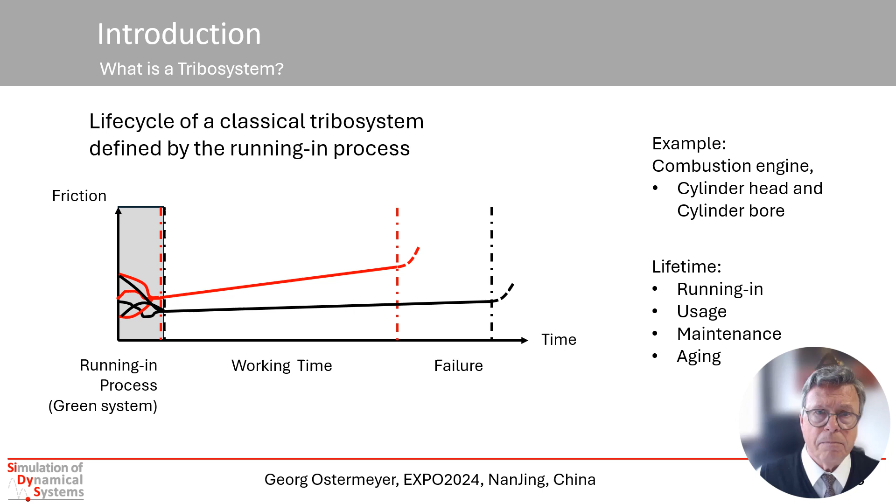The OEMs started to analyze that, and they really found a solution. They found out that the surface finishing is essential, and the running-in process is nothing other than, let me say, a nanocrystalline structure of the material on the inside of the cylinder bore, with a few additives embedded from the oil which is used. And doing that, they could guarantee a rather long lifetime, which is independent of the misuse of the customers.

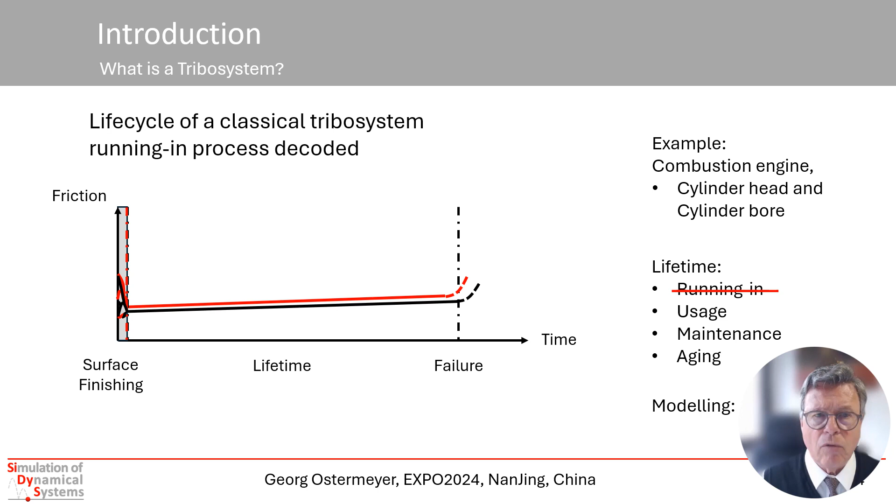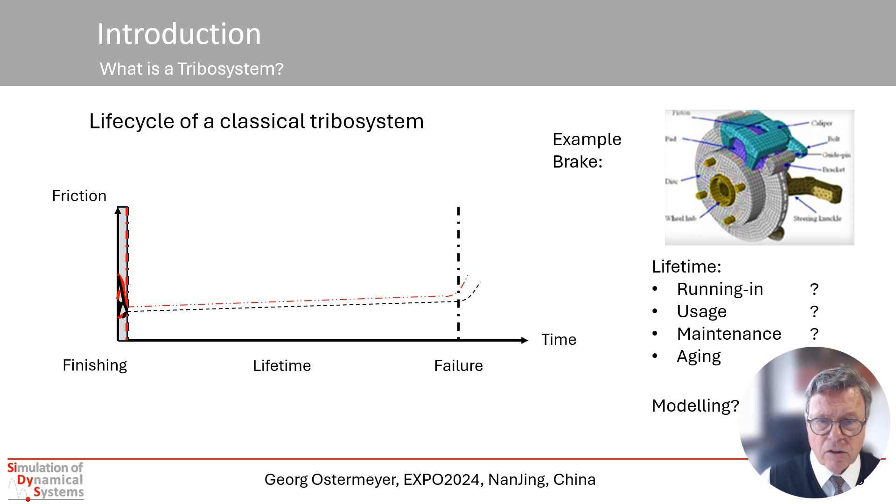Of course, the lifetime of this system is defined too by the usage, by the maintenance, and by the aging. But whatever there is, the modeling of such a system is always concentrating on the lifetime, on the working time of such a tribosystem. But let me come back to the brake system. Again, the brake system is a very famous classical tribosystem.

This brake, a classical tribosystem, is a very complex material system. We have very different friction partners. We have very high friction power in the system, and we have wear in the system, essentially changing this system. And so it is absolutely unknown what the real running-in procedure for brakes is.

Of course, you know some bedding applications you are using, which do something like that. You have rotor coating. Coating seems to be a good idea because that is usually one part of the running-in process of classical tribal systems, and that is the reason why rotor coatings usually have a very good impact on friction in brakes.

The usage. The influence of usage is nearly unknown. We have changes in usage through the new mobility, moving from combustion engines to electrical engines. There are emission constraints coming up, which affect the mobility of these brake systems. And we have maintenance questions. What is humidity doing with the brake pad? In the last years a lot of papers dealing with that question have come up. It is not solved yet.

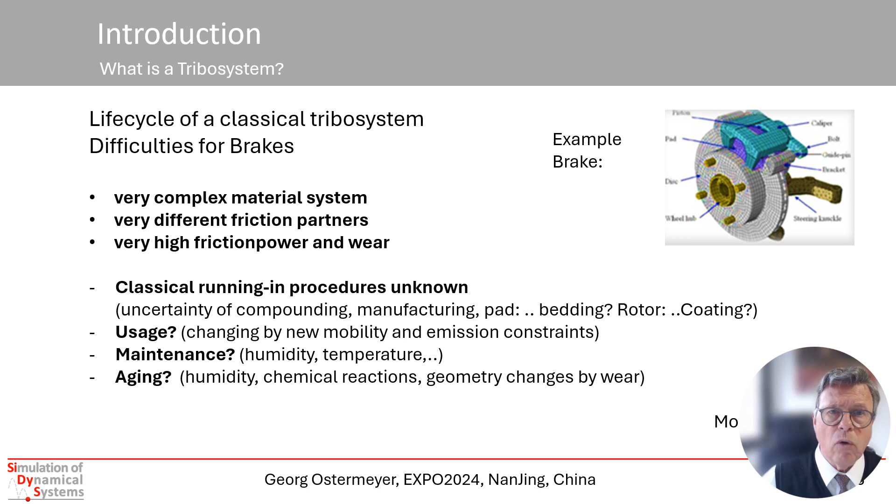And usually this model is a simplified substitute of this clipping region in the world. And the idea is just to replace questions to the world by questions to the model. And there are very different realizations of this substitute. Human intelligence, this is rather old, but you can have purely hardware realizations, for instance, systems, chassis dyno,

inertia dyno, scale test, or whatever hardware you are using. There can be abstract models, abstract descriptions, as known from mathematics or physics. And there can be hybrid models which are partially hardware, partially abstract. A very famous name in this is hardware-in-the-loop simulation, coming up in the last years.

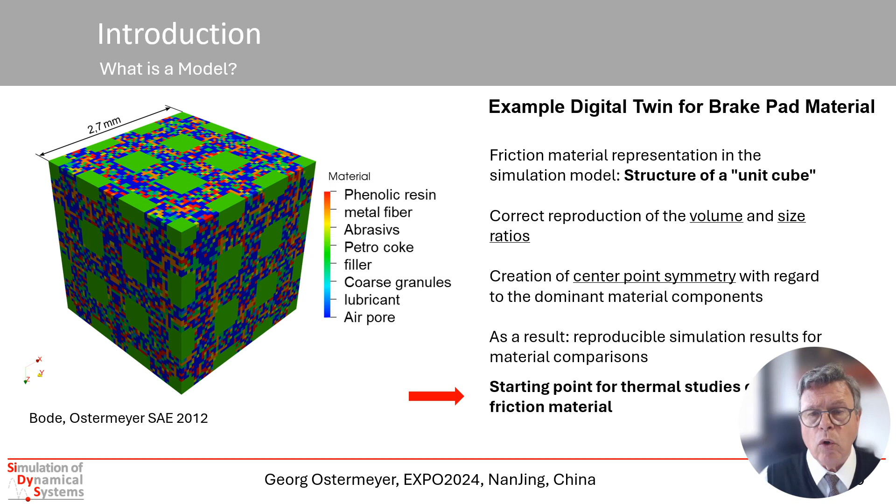And as a result, we get rather good reproducible simulation for material comparisons. And that is the starting point for thermal studies we did 12 years ago. Here you see a very simple example. The brake disc is coming down to the upper face of this cube.

You see just at the beginning of the brake operation, the disc surface heats the brake pad, and then the heat is running into the brake pad because of the very, very different thermal behavior of the materials we have in the brake pad. And at nearly the end of the brake, the disc is cooling down the surface because the disc cools much quicker than the brake pad. So we have in the brake pad something like a heat wave which is running through the pad rather slowly.

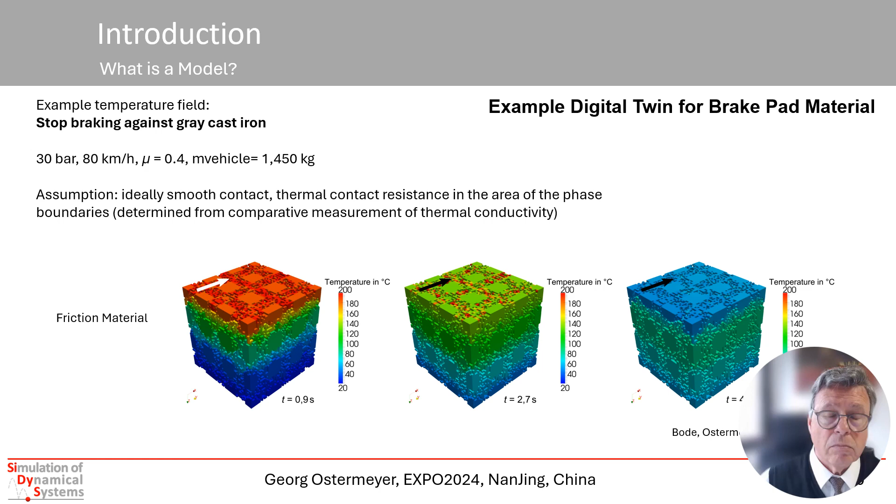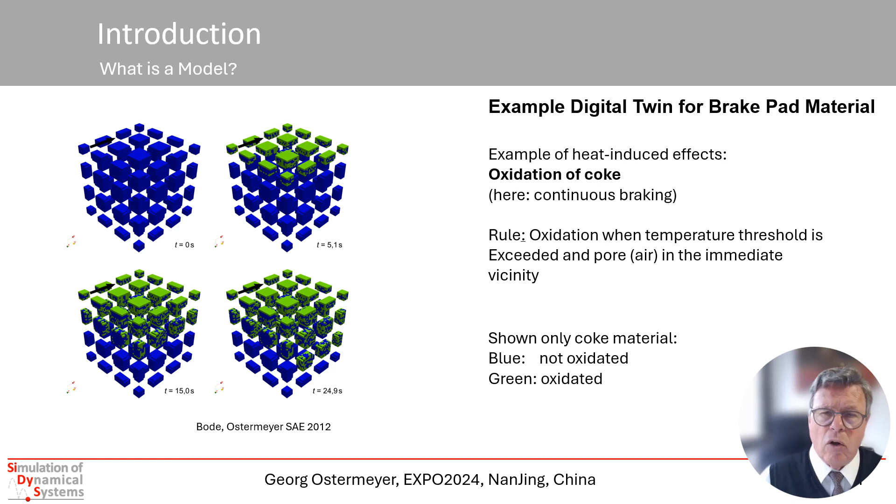By such heat dynamics, we can then look, for instance, for the oxidation of coke. That means when we have at a special point inside the brake pad a special temperature, and there we have in a direct neighborhood coke and air, then oxidation is possible. And what we can see here is something like a dynamic observation of that. There were a lot of papers in the last years dealing with post-mortem detection of these things. This is a possibility to do that online.

Another question Mr. Bode computed here is the pyrolysis of phenolic resin. These rules you can get here from reaction charts which show when there is a special temperature, then this phenolic resin is going in that constitution, that direction.

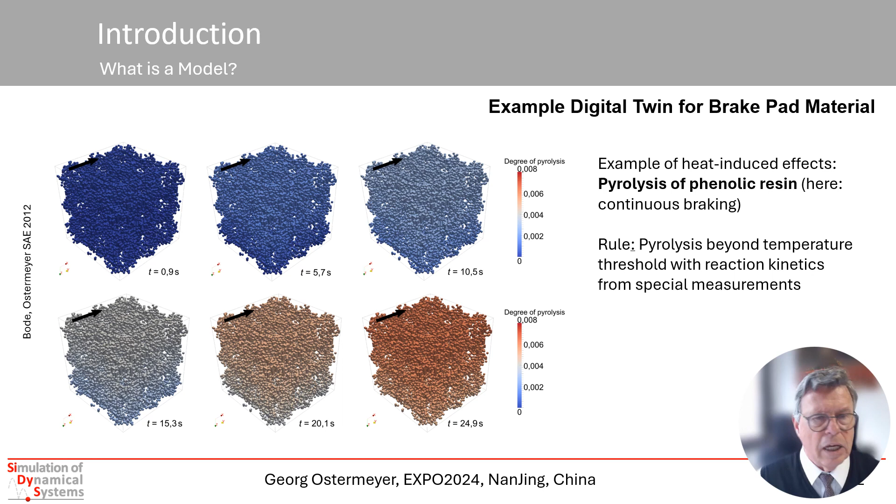Last but not least, we are just reactivating these models and start to question what humidity is doing with brake pads, because that is a very current question and there is no answer yet. And we believe that we have here the possibility to understand some of these effects humidity is having on the brake pad.

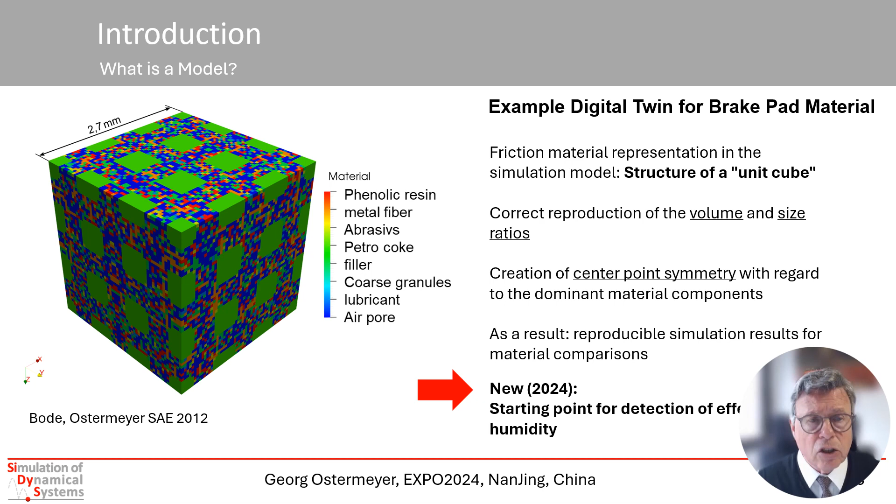When you look at the realizations of this substitute, the hardware, hybrid, and abstract models have another property: they produce a huge amount of data. To handle these data, a new word is coming up, that is big data. And the science taking care of that is data science. It looks not only at handling big data, but also at understanding the structure of these data and the information in these data sets.

Besides data science, the notion of artificial intelligence is coming up. And with those, again, twins and digital twins should be generated. AI is a very famous word, and I would like to go a little more into detail on the history of AI and then go to the data. Artificial intelligence is surprisingly very old. Each culture has its roots, like the golem or homunculus, where they think about artificial intelligence, artificial human beings. This is found in nearly every culture.

But the start point is, I think, a paper from Turing on machine intelligence. Turing did unbelievably fine work on the question that you can deal with nearly every problem with digital systems. And in '56, AI was founded as an academic discipline for the first time, I think in America. But that was not very successful. It was the first wave, but the computer power was very low. The algorithms were nearly unknown, so this first wave went down, and we got a first AI winter.

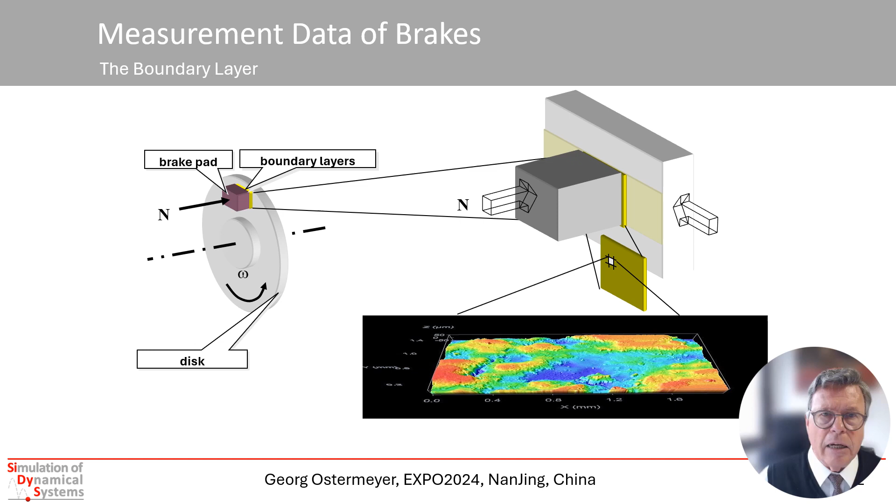The principal functionality of that can be seen here. We have input power, and the input power produces wear and heat. The wear produces wear particles. The wear particles, together with the heat, produce these additional contact patches, which make the friction coefficient a little bit larger. On the other side, we have corrosion effects by wear, which will limit the lifetime of these additional contact patches.

So when we're looking at the friction, the idea is to look for the equilibrium of flow of the friction coefficient instead of the friction coefficient itself. So we have functions which want to move up the friction coefficient and other effects which want to lower the friction coefficient. And when you are writing it down, then you come to this friction model. It's a differential equation of second order, which can describe this friction of brakes rather well.

We have simulated this idea of this boundary layer dynamics, and we've confirmed the dynamics of patch and non-patch geometry of such a brake pad. And we can confirm the topography, we can confirm the wear in principle, and we can confirm the heat distribution we have in these brake pads.

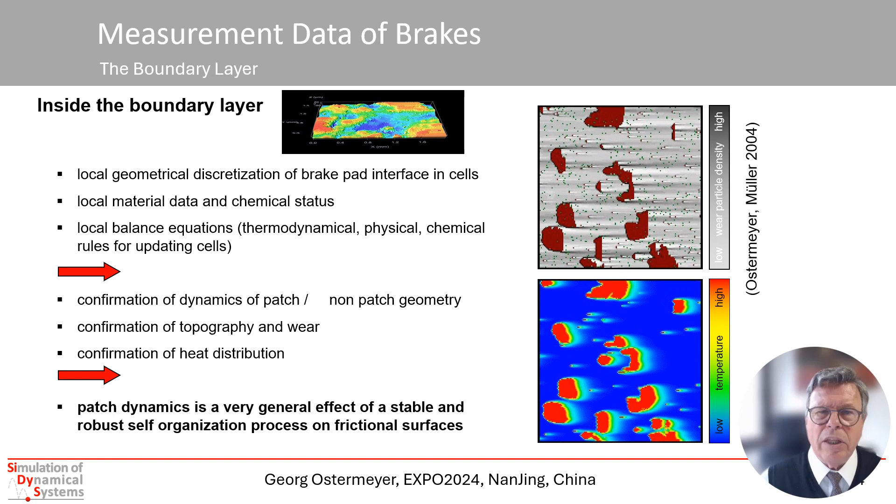And what we found out is that this patch dynamic is a very general effect of a stable and robust self-organization process on friction surfaces, not only brakes. That is, for instance, hip joints. You have such a film which has such a patch, non-patch structure, which is dynamically changing. When you're looking at rail-wheel contact, you find on the rails layers which are something like these patches which are breathing here on the rail. And this was a key to understand a little bit more of what in brakes is possible.

So taking into account the dynamics of this patch geometry, we have an explanation for the variation of mu during the braking history. And when we go down with the time scale and look at a very short time scale on these patches, then the patch geometry is frozen, but the patches are lying on a soft polymer matrix and can move tangentially.

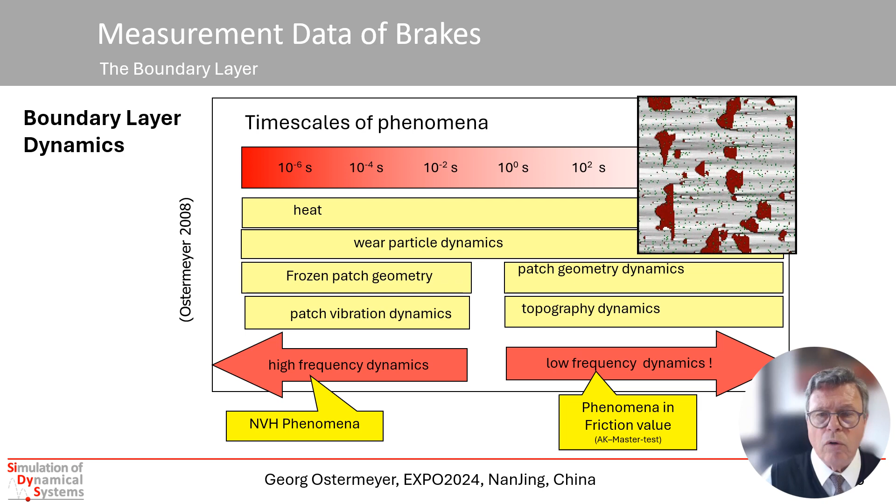And these vibrations are very high frequency vibrations, and there can be synchronization effects, making something like a really strong wave which is running through the brake pad, and that can explain even NVH phenomena, and that was the starting point for much other research in these topics. Of course, the main question is how we get the parameters of this differential equation set.

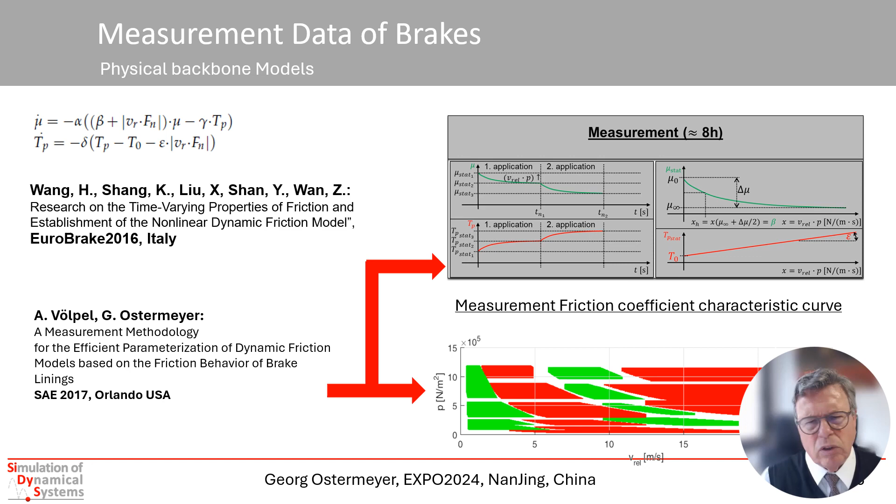There was a very famous work, best paper, from Wang and others. He has a very nice method to get these parameters and to deal with these equations. And then one year later, there was a very nice paper by Völpel and me at the SAE conference in the USA. Mr. Völpel found out that if you use four areas in the pressure velocity diagram, for which you use an own set of parameters for this differential equation, then we're able to describe the friction of brakes very well.

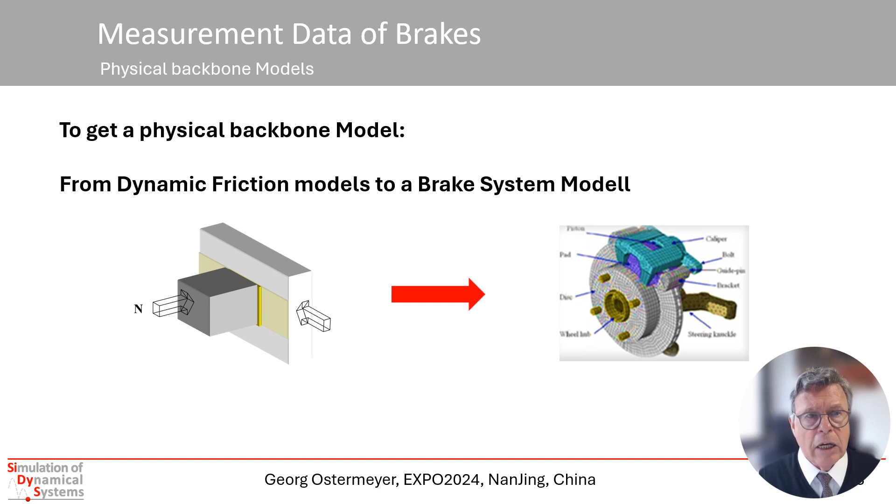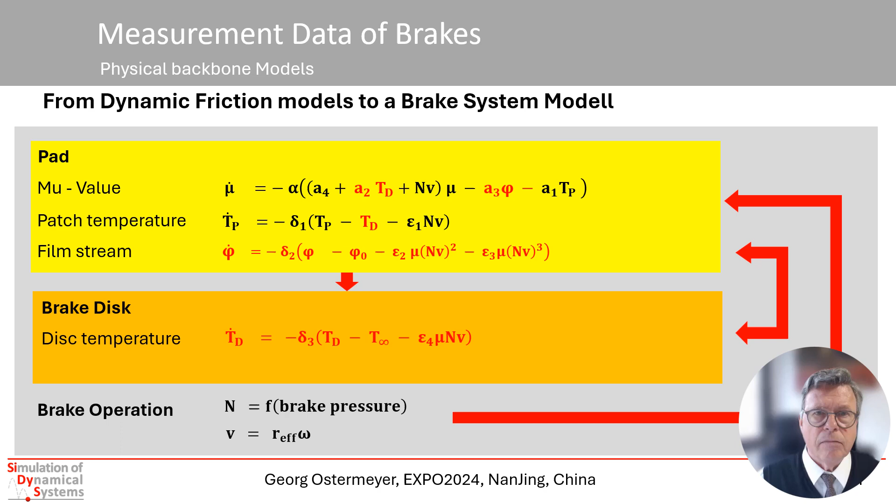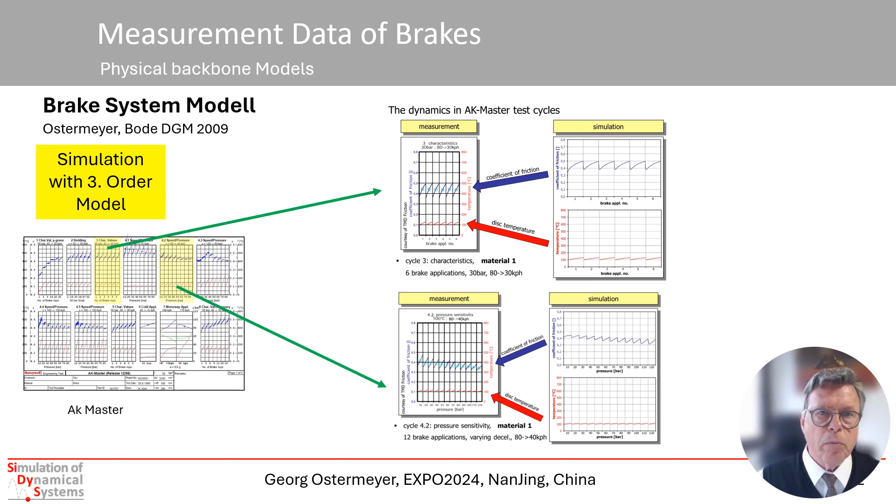And even with this model, we are able to simulate nearly every part of the AK Master test. Here you see, for instance, two different materials; a rather good approximation we got. And even the SAE J2521 test can be simulated rather well. You see here the black crosses, that is the measurement data. The red line is the simulation.

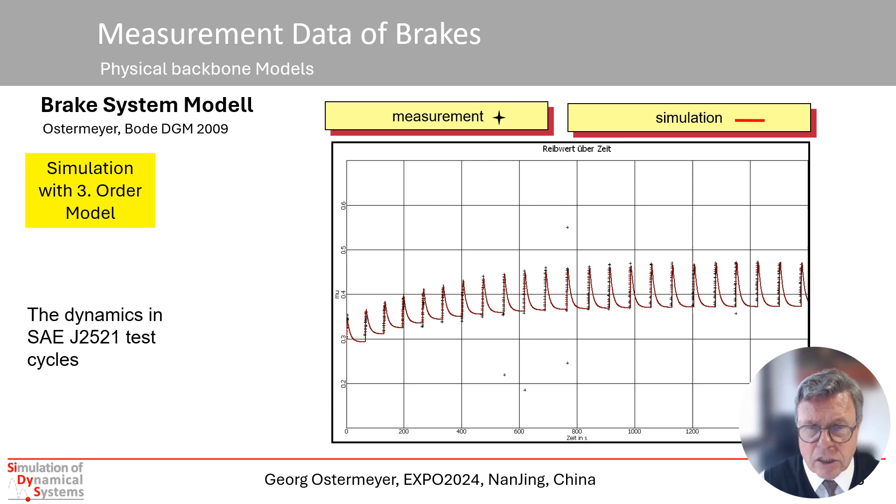Please keep in mind that this brake model has to be simulated too in the time intervals where there is no brake operation, because you need this time to cool down the disc. But of course, you can refine this model in many ways. One thing is, for instance, the film the brake pad is producing is lying on the disc and then running on the disc back to the pad again.

So we have something like an input and an output of this film stream by the brake pad, and we have information on how what is coming out of the brake pad is running into the brake pad again after one round on the disc. So in this very simple form, you see here the film stream in the brake disc. It is describing only wear. Delta 4 is something like a wear constant, Archard's constant, we can use here in this form.

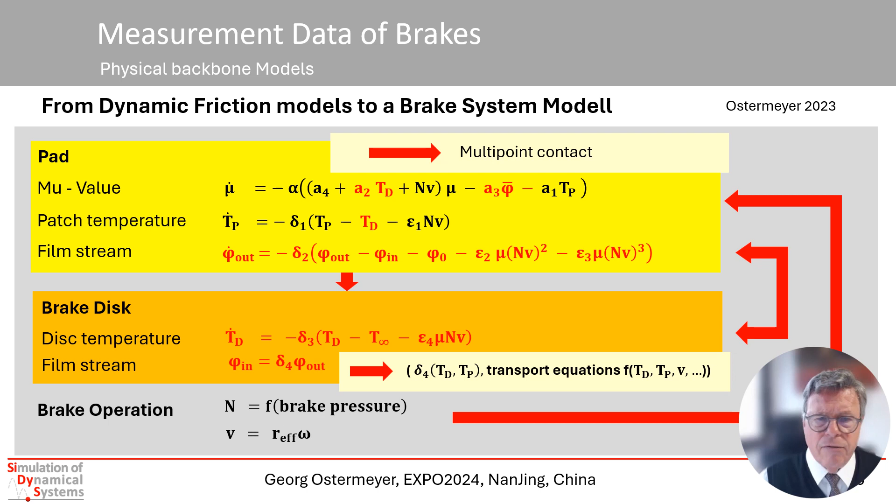But in this form, it is a rather simple approximation of the brake, because what we have here as a pad model is a one-point contact, and we know that the brake pad, of course, is a summation of many points or many contacts. On the other side, on the brake disc, we can put a lot more intelligence in the equations. For instance, using transport equations for how this film is changing from the output of the brake pad to the input of the brake pad again. It's temperature dependent, velocity dependent, and so on. And so we can deal here even with questions on the emission behavior of the brake pad, the brake system.

But whatever you do, the more complicated we make this model, we get a really huge problem, because we get so many parameters in the model that the question is where we get these parameters. And a model where you cannot identify the parameters is absolutely useless. So the question is how we can find the parameters even when there are many parameters in our model.

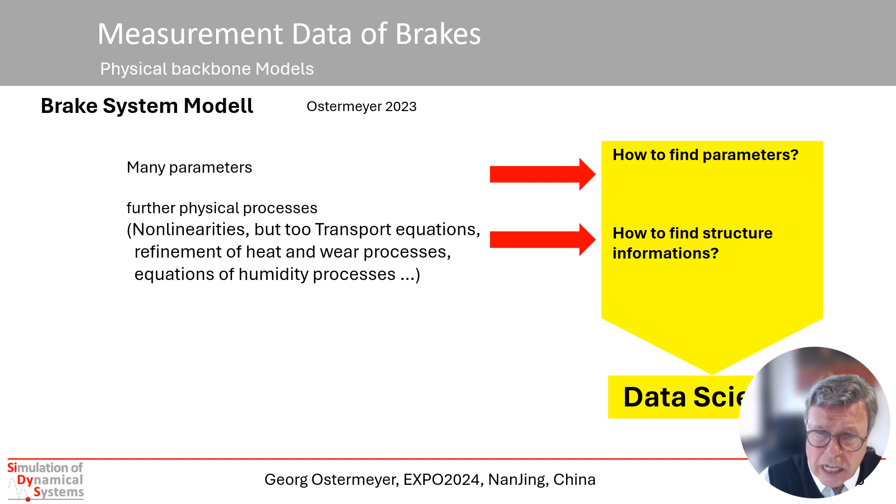And the next question, of course, is when we have such a backbone model, then we have a physical model in mind. And the question is, is it possible to ask the data set whether there is an explanation for another physical model inside it? So is it possible to get more information on the physical processes described by this data set? This is, of course, the starting point for data science in this talk. So I will look at the parameterization of physical models, and the next step, the question is whether it is possible and how to do the detection of new models in the data sets.

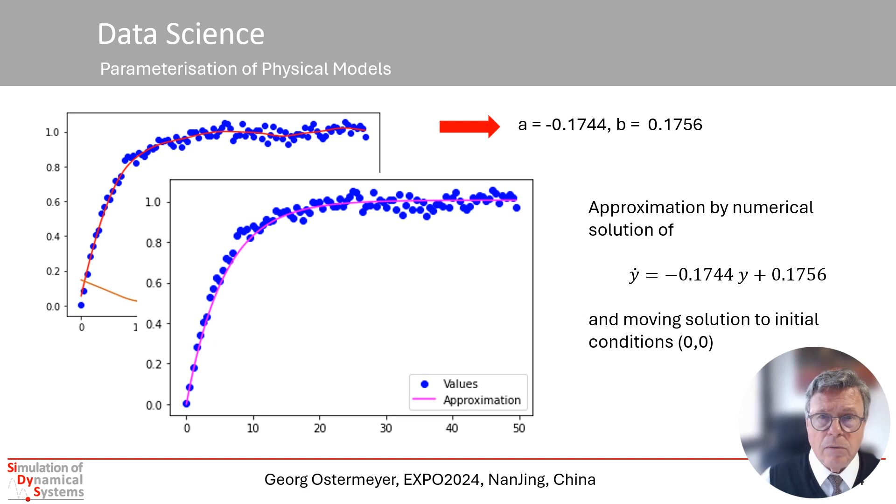Then, of course, the vector c we want to compute has to get another component, and then we can compute that, and we can ask for the parameters we have for v square in our measurement data.